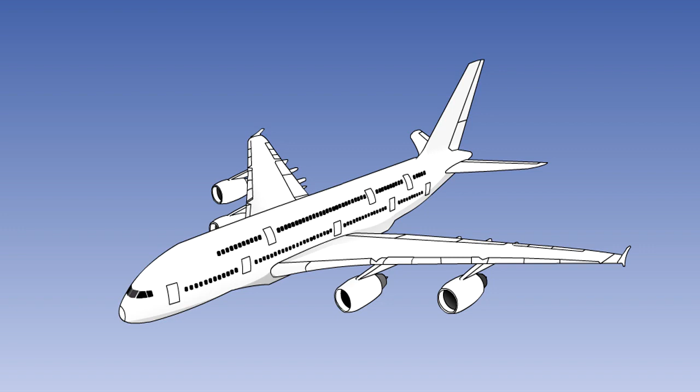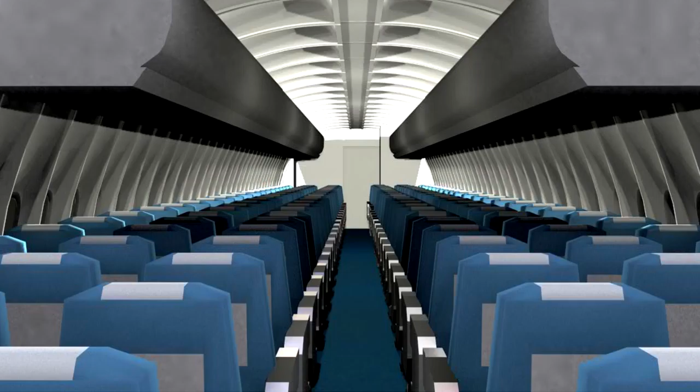Modern aircraft operate more efficiently at high altitudes, and they have high rates of climb and descent. In order to take advantage of these properties, the interior of an aircraft flying at high altitude is pressurized to allow passengers and crew to function normally without the need for additional oxygen.

Up to an altitude of 10,000 feet, the air pressure, and consequently the amount of oxygen, is sufficient for humans to operate without too many problems. However, the effects of lack of oxygen can become apparent at altitudes above this.

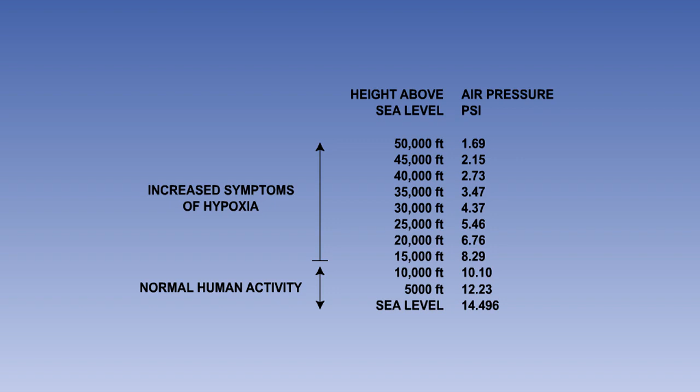To prevent any risk of problems due to a lack of oxygen, it is a regulatory requirement that cabin pressurization systems are designed to produce conditions equivalent to a maximum of 8,000 feet in the aircraft cabin. This means that there is no need for oxygen equipment except for emergency use by crew or passengers.

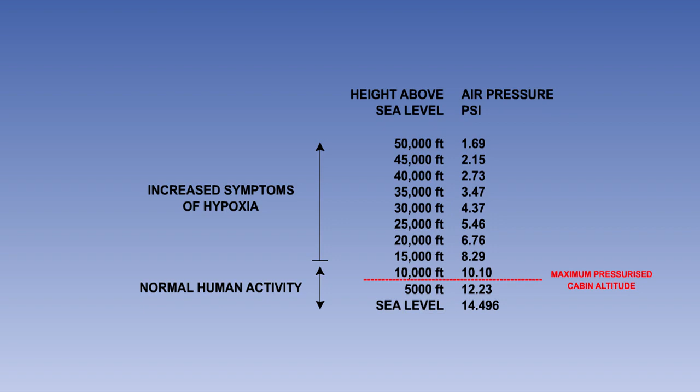The difference in pressure between the pressurized hull and the atmosphere produces stresses, which are applied cyclically every time the aircraft is pressurized and depressurized, causing fatigue, which can ultimately lead to structural failure. The airframe structure must be strong enough to withstand the differential pressures generated.

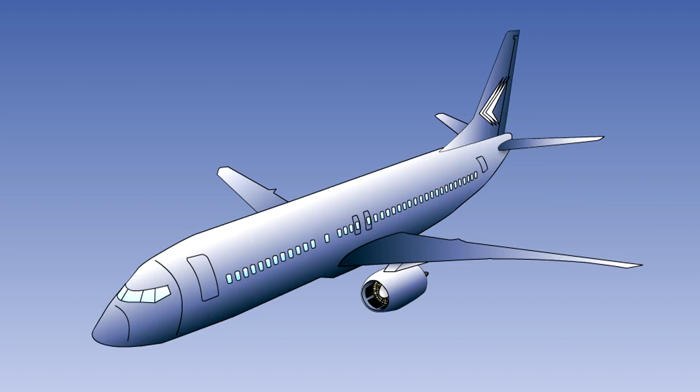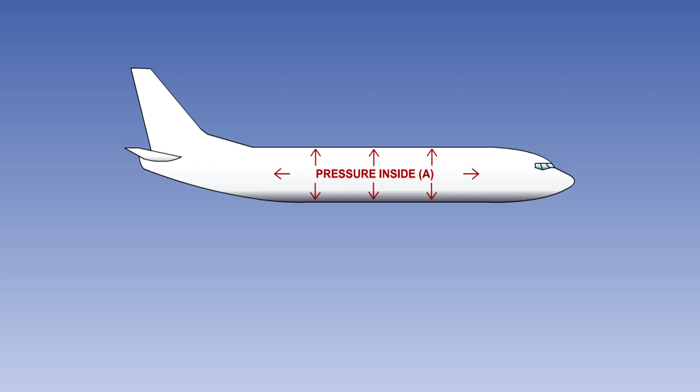The aircraft manufacturer will set as a structural limit a maximum differential pressure. That is, the difference between the pressure inside the pressurized compartment and the pressure of outside air, which the pressurized hull can safely withstand. The normal operating maximum will be slightly lower than this.

On modern transport aircraft, the normal operating maximum differential pressure is typically between 8 and 9 pounds per square inch, or psi, or between 552 and 621 hectopascals.

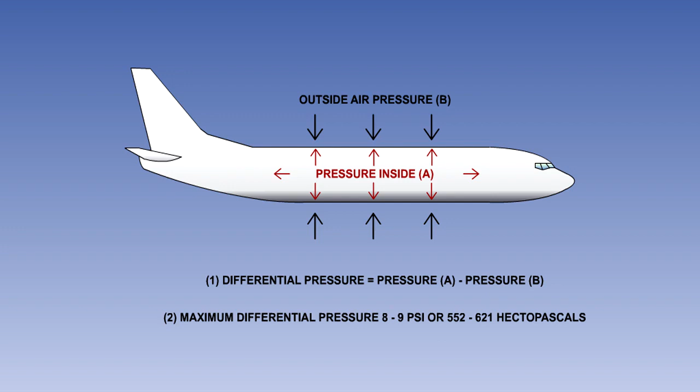This maximum differential pressure, along with the maximum permitted cabin altitude of 8,000 feet, will set a maximum for the altitude at which the aircraft can operate.

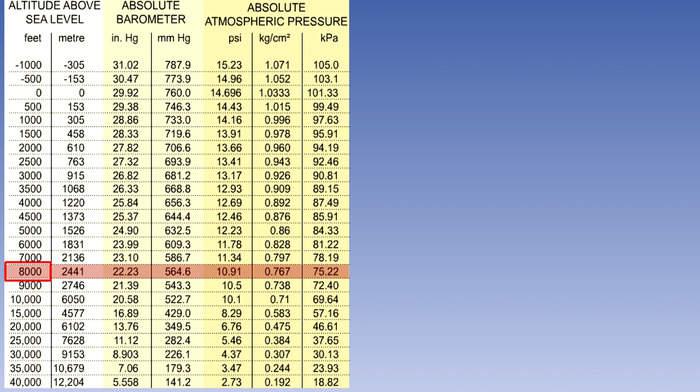As you can see from this barometric pressure table, the air pressure at 8,000 feet is 10.91 psi. So if the manufacturer has set the aircraft's maximum differential pressure at 8.2 psi, then the minimum outside pressure is 10.91 minus 8.2, which equals 2.71.

We can see from the chart that this equates to just a touch over 40,000 feet. Thus, an aircraft with a maximum differential pressure limit of 8.2 psi will have a maximum operating altitude of 40,000 feet. This is, of course, the pressurization limit. The aircraft's maximum altitude may be further limited by other factors.

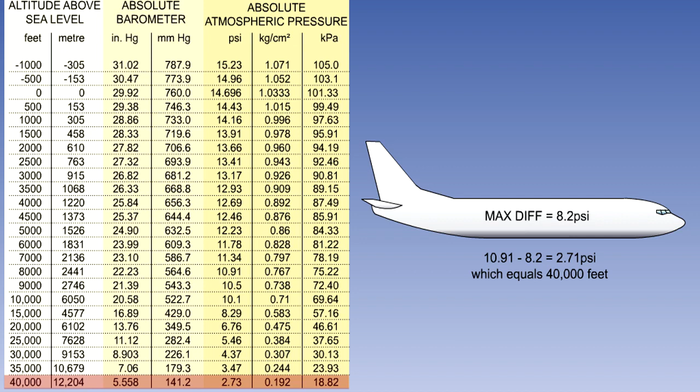If the maximum permitted differential pressure is reduced by an aircraft defect, for instance a cracked cockpit window, the maximum aircraft altitude will also be reduced by the need to maintain the maximum cabin altitude at 8,000 feet.

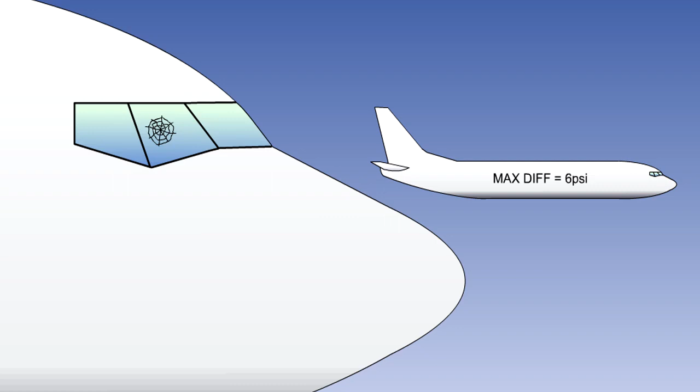For instance, if the maximum differential pressure is reduced to 6 psi, then the minimum outside pressure will now be the pressure at 8,000 feet, which is 10.91 psi minus 6, which equals 4.91 psi.

From the table, the altitude equal to 4.91 psi is approximately 27,000 feet. This is the maximum altitude limit with a differential pressure of 6 psi.

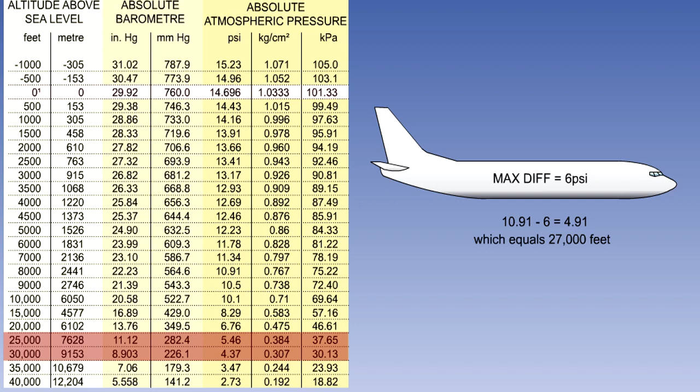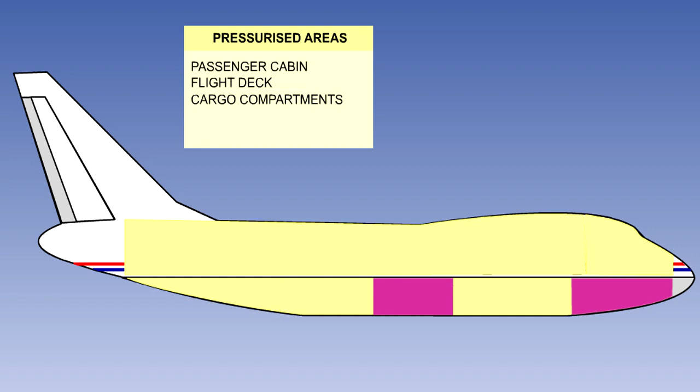The passenger cabin, flight deck, and cargo compartments are normally pressurized. The landing gear bays, radome, and the tail and nose cones are unpressurized.

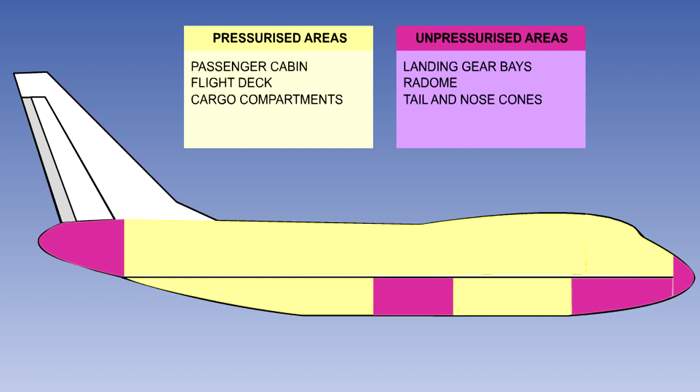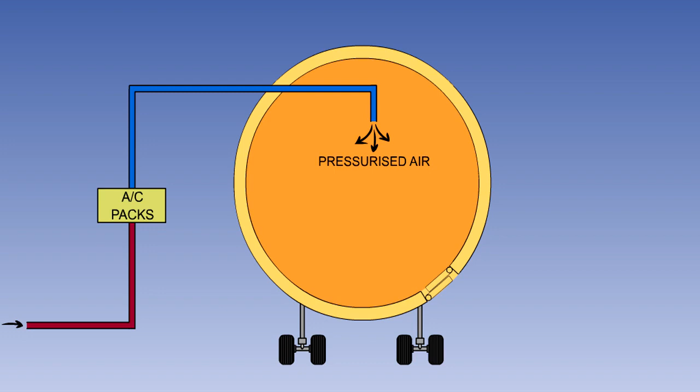Cabin pressurization is achieved and controlled by having a constant mass flow of air entering the cabin from the conditioning system, and then varying the rate at which it is discharged to atmosphere. The constant mass flow of air is supplied by the air conditioning packs via their mass flow controllers, and is discharged to atmosphere through the discharge or outflow valve or valves.

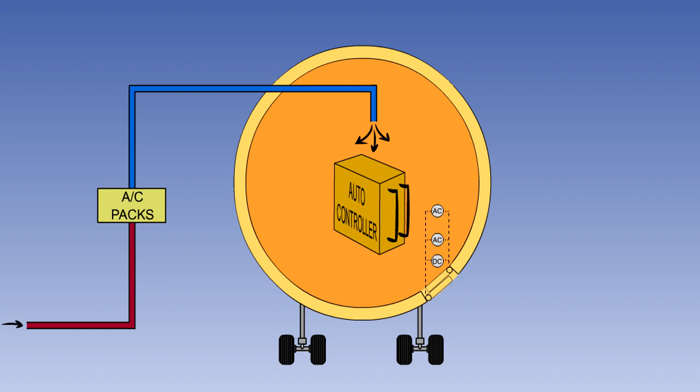The position of the outflow valve can be controlled either automatically by an automatic pressurization controller or manually by the flight crew.

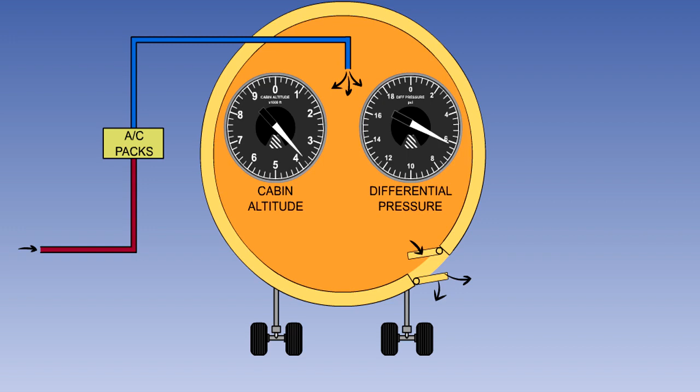Closing the outflow valve reduces the outflow and increases the cabin pressure, causing the cabin altitude to descend. Opening the valve has the opposite effect, increasing the outflow, reducing the cabin pressure, and causing the cabin to climb.

There are a number of safety devices which must be fitted to any cabin pressurization system. The safety valve is a simple mechanical outwards pressure relief valve, fitted to relieve positive pressure in the cabin when the normal maximum pressure differential allowed for the aircraft type is exceeded, preventing the structural limit from being exceeded. This valve is totally independent of all other control systems, and will open if the cabin differential pressure rises to approximately 0.25 psi above the normal maximum. The regulations stipulate that there must be 2 safety valves fitted.

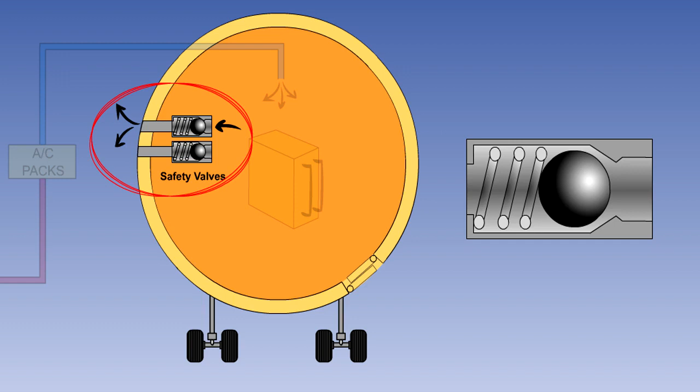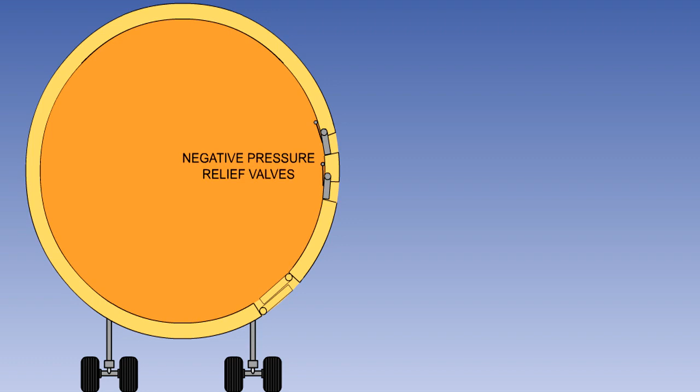The fuselage is designed to withstand the positive differential pressure produced by the pressurization system. However, it is not able to withstand the crushing forces that a negative pressure differential would produce. To prevent this problem, simple mechanical inwards relief valves are fitted. They will open if the pressure outside the aircraft exceeds that inside by 0.5 to 1.0 psi. There must also be 2 of these valves.

The inwards and outwards safety valves may be combined together in one unit, or may be completely separate components. They are positioned above the aircraft flotation line, so that in the event of a landing on water, they will not allow the water to flow into the aircraft.

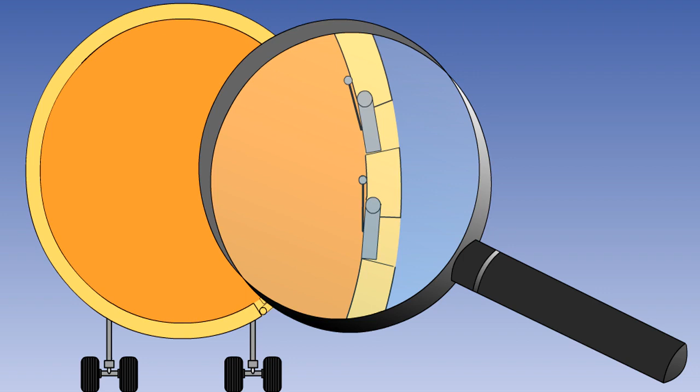The dump valve is a manually operated component. It enables the crew to reduce the cabin pressure to 0 for emergency depressurization. This valve may, in some systems, also be used as the air outlet during manual operation of the pressurization system.

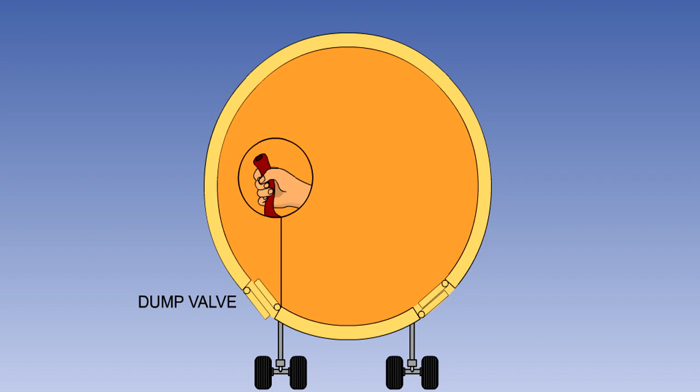Blowout panels are fitted in the floor between passenger and cargo compartments, in order to prevent excessive differences in pressure occurring between these areas in the event of, for example, a cargo door opening in flight. The panels are normally fitted under passenger seats, and they are held in place by springs. If a cargo door should open, then the pressure differential between the passenger and cargo compartments will overcome the springs and the panels will open, equalizing the pressure between the compartments before the floor structure is damaged.

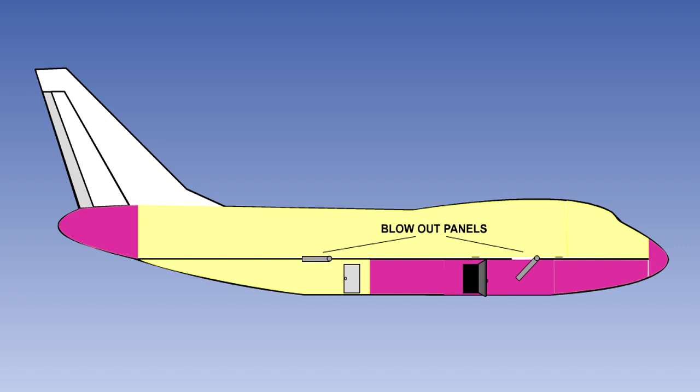Some systems are fitted with a ditching control, which will close all the discharge valves in the event of a forced landing on water. This will reduce the flow of water into the cabin.

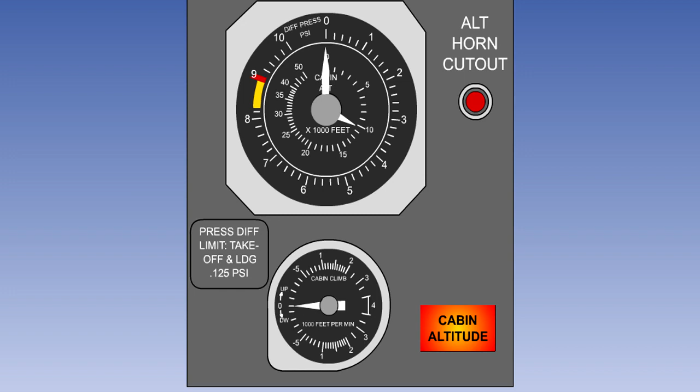There will be an aural or visual warning if the cabin altitude exceeds 10,000 feet. The aural warning may take the form of a horn, and the visual warning a red light in prominent view of the pilot. There is normally a horn cutout button which can be depressed to cancel the horn.

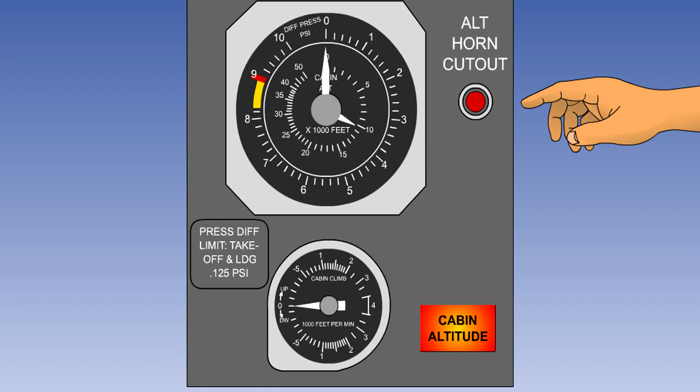You should now know that the maximum permitted cabin altitude is 8,000 feet, and that the normal maximum positive differential pressure is between 8 and 9 psi. You should understand that the aircraft's maximum operating altitude is dependent upon the maximum differential pressure, and given a barometric pressure table, you should be able to calculate this maximum altitude.

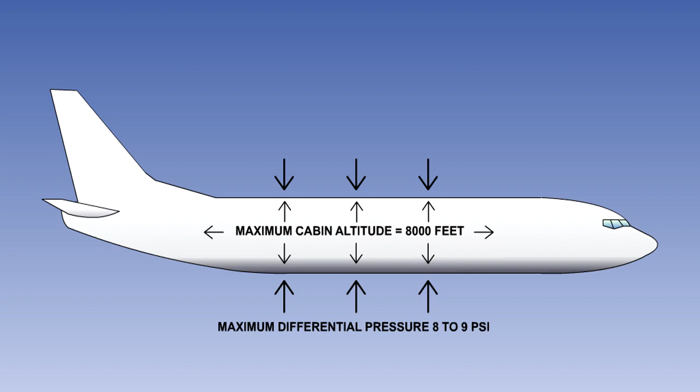You should also know that the pressurization is controlled by having a constant mass flow of air into the fuselage and controlling its exit using outflow valves. You should understand the purpose of the various safety devices fitted to a pressurization system. The positive outward opening pressure relief valves prevent the structurally limiting maximum differential pressure from being exceeded, and negative inward opening relief valves prevent the pressure inside the cabin becoming less than that outside.

The dump valve is used to completely depressurize the aircraft, and the ditching control is used to close all outflow valves prior to the aircraft landing on water. Blowout panels are fitted in the floor between passenger and cargo compartments in order to prevent excessive differences in pressure occurring between these areas. And finally, an aural or visual warning will be given to the crew when the cabin altitude exceeds 10,000 feet.